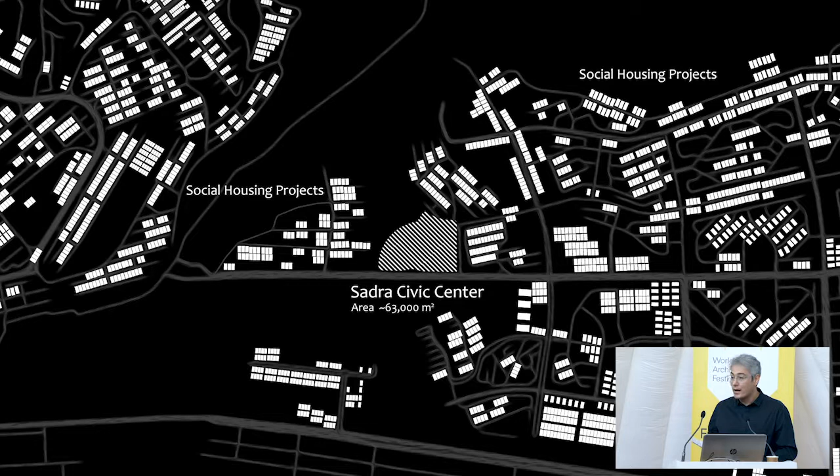The site of the project was surrounded by social housing projects that have been conceived and executed in the worst way possible. A repetition of typologies which are more about isolation than connectedness. Public space is just a residual of serial placement of low-quality residential towers.

But we have historically experienced living in different spaces in central Iran, where central courtyards organized roofed spaces of a house or neighborhood in continuous connection with nature, shadow, and the ground. In this project, we try to redefine the central courtyards by making them a public field instead of private ones, with diverse interconnections.

Roofed spaces are arranged around these permeable connected yards, and instead of a linear circulation, we have a sequence of connected agoras with varying scales. There is no street anymore.

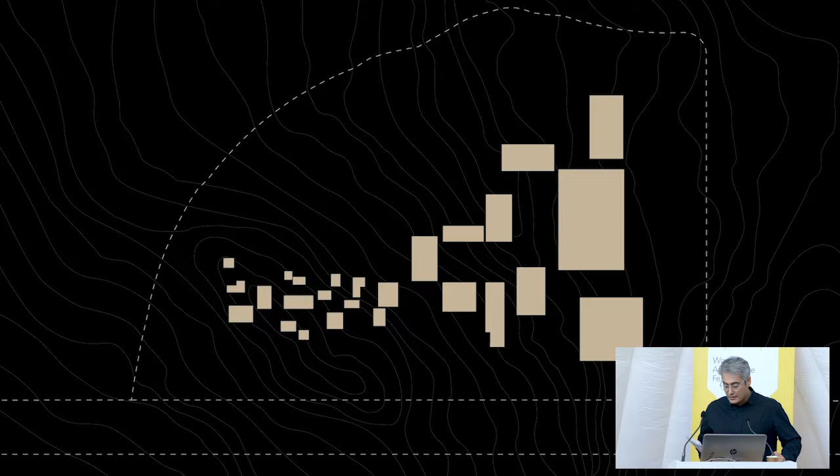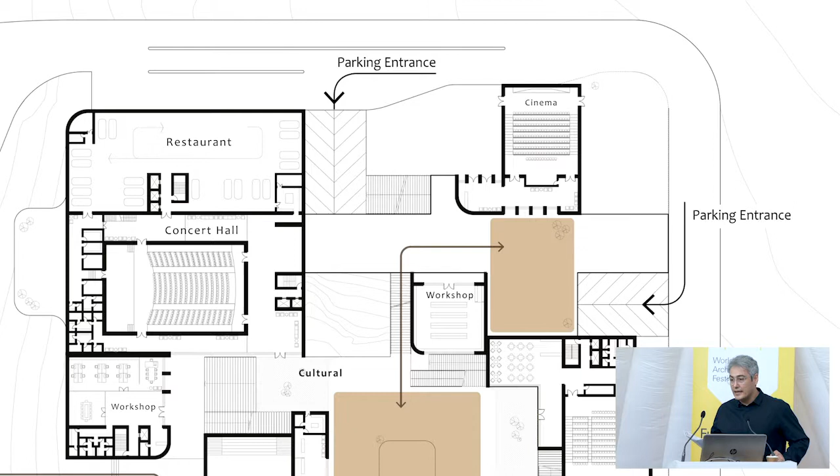In other words, not only do the yards inform the overall configuration of the project, but also the spatial pockets that host various programs are informed by them in terms of their scale and orientation, to form a connection between cells, as well as a healthy relationship between the project and the ground.

The result provides an antithesis for the neighboring social housing in its organization, its approach to provision of public space, in relation to the ground, and even in its way of negotiating the skyline.

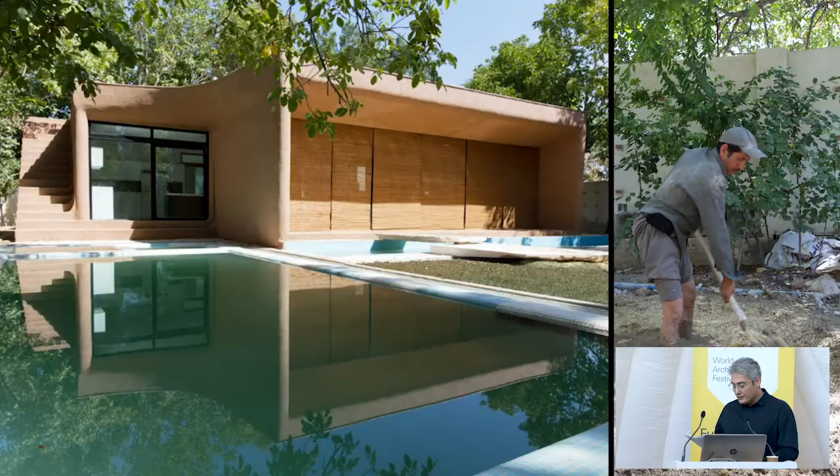In villages of Iran, construction is done by local people. Material formation is more primitive, approximate, and improvised. In the final round of the competition, inspired by the traditions of placemaking and construction, we try to develop a solution for the construction of the project.

The proposed construction technology builds upon our previous experiments. In a previous project, we gave some flexible guidelines to Mr. Hamid Khan, the son of the neighborhood grocer, to build a quality space from earth material.

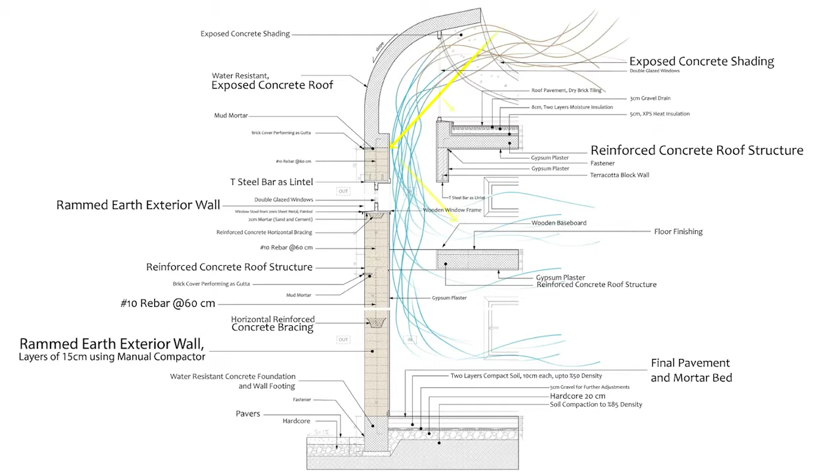We heard that later on he continued doing this for a living. We wanted to consult him about the construction of this project, but he was too busy to answer the call.

Here too, residential units will be gradually built around the courtyards by local people. Little by little, the city-like complex would grow from the ground.

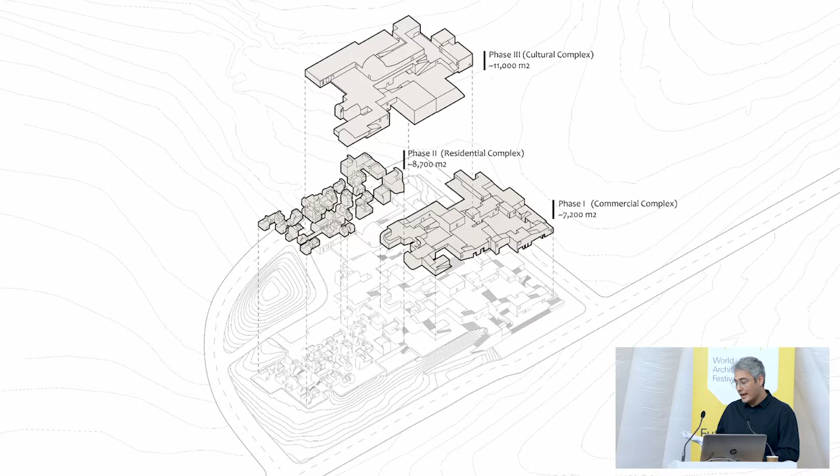In this hostile climate, a combination of form and material play the role of passive solutions for climate control. The growable gene of these material-driven forms can interlace the whole fabric of clusters in different scales related to their program.

With an active skyline in the desert, similar to the concept of thick ground, as traditional Iranian cities were often called, this is achieved through a series of proposed land operations to activate differing spatial datums.

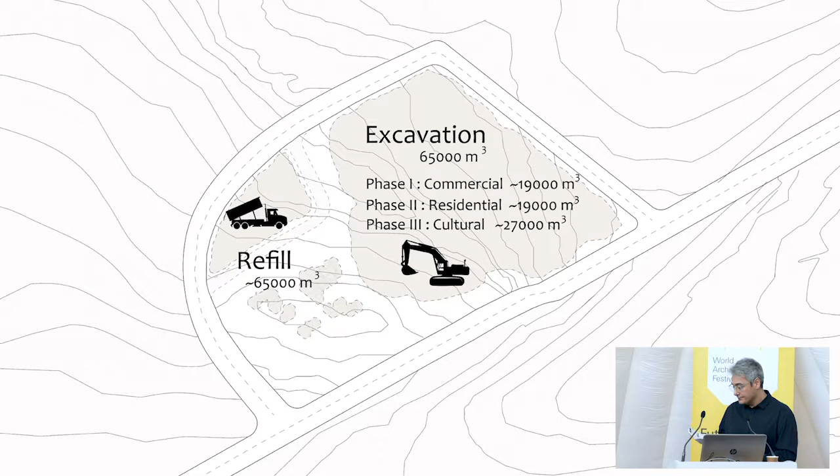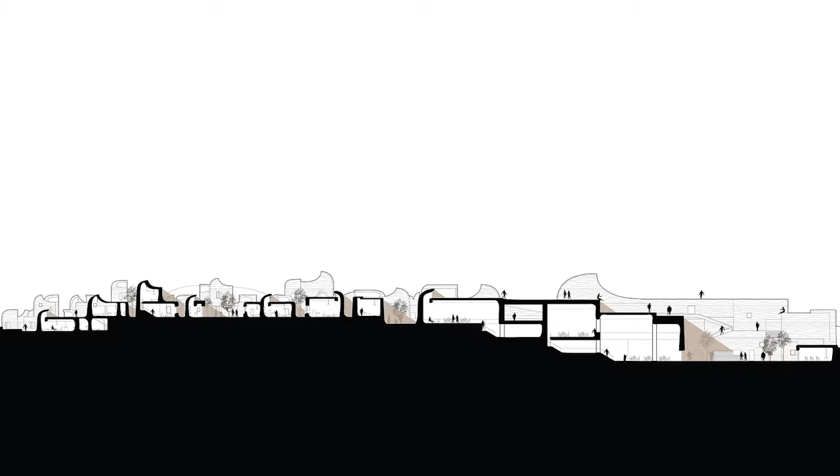In the center of Iran, the limits of shadow are the limits of habitable space. Variety of scales and different heights make different degrees of shading in shared space. This effect facilitates passage and pause in the project.

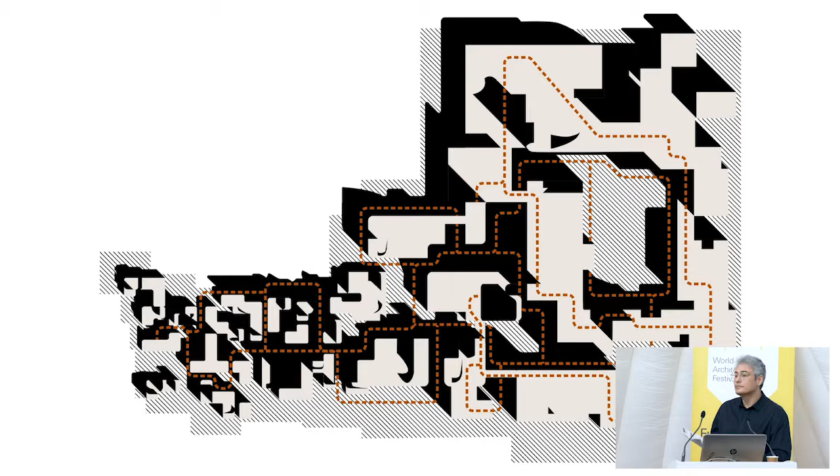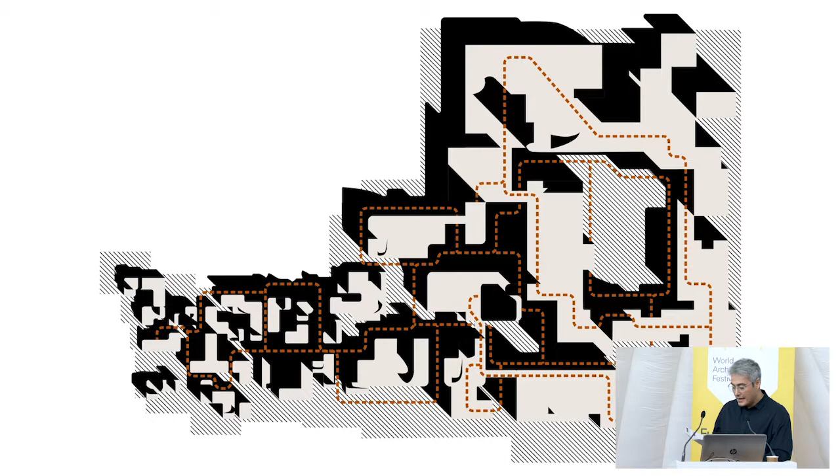Vast and diverse interiority provides services and welfare infrastructure for the district, and even beyond that, has the generosity to welcome the neighboring social housing inhabitants.

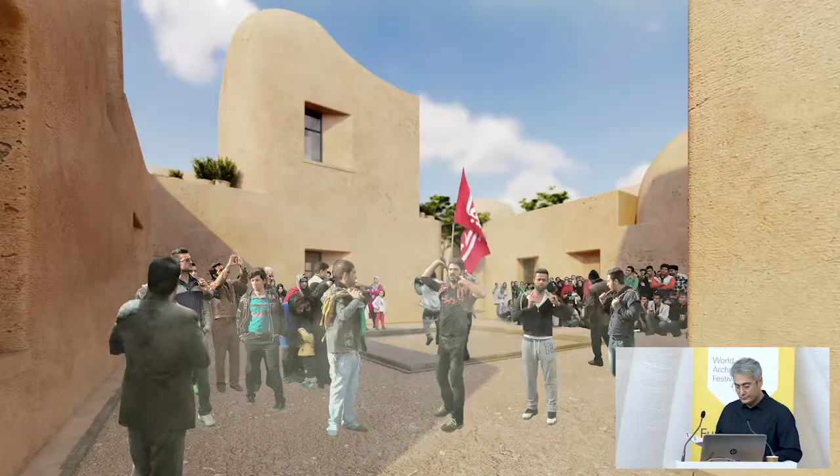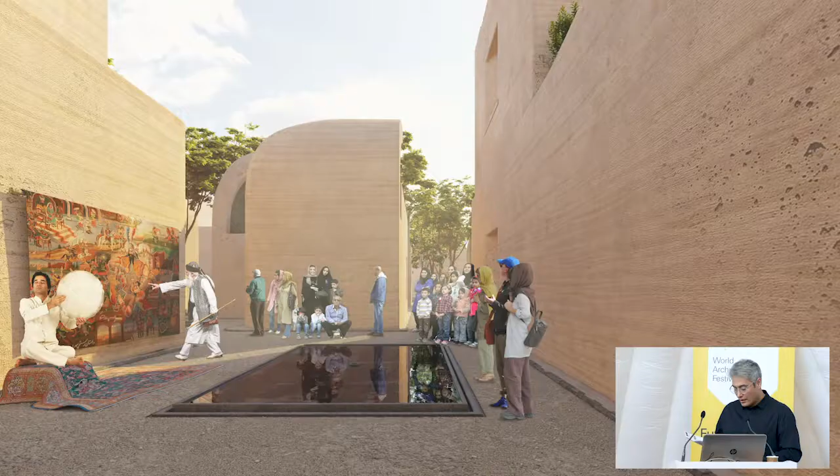In religious ceremonies or social celebrations, in cultural events, and even practice of daily life.

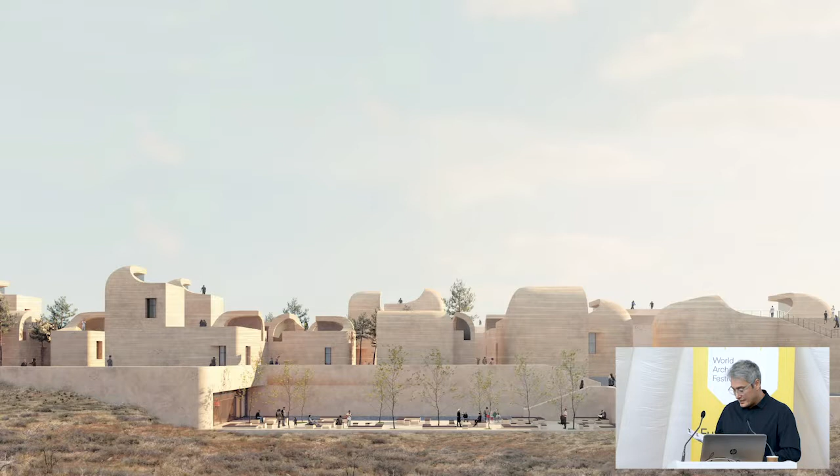Such a space is what I wish for us in Iran. A space that is informed by economic realities and spatio-social possibilities to resist the mass-minded production of space, right on the border of familiarity and strangeness. Thank you very much.

Thank you. Another really fascinating presentation. Karen, kick us off. Okay.

Thank you for your presentation. It's great. I think the starkness between the housing and this is enormous. I just imagine what it will look like in 10 years' time when people have moved in and put 100 satellite dishes or aerials and all the stuff people come with. And I think that is what is important. And I think of Doshi, the Indian architect, and how his housing and his projects actually accommodate for that.

So for me, it would really be, how is this going to look when the real people are there, and how much are you allowing for that, so that there's more difference, which is in the villages you showed us?

Actually, this mixed use is some cultural and also commercial, and the little masses are residential for renting, and the municipality wants to build this project because it compensates for the lack of culture and lack of standard of living in that housing. It's not one project, it's 7 projects in that area, in that city.

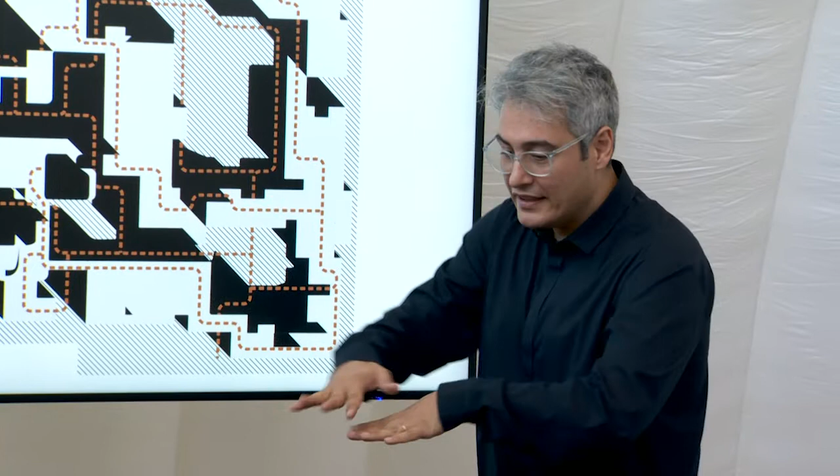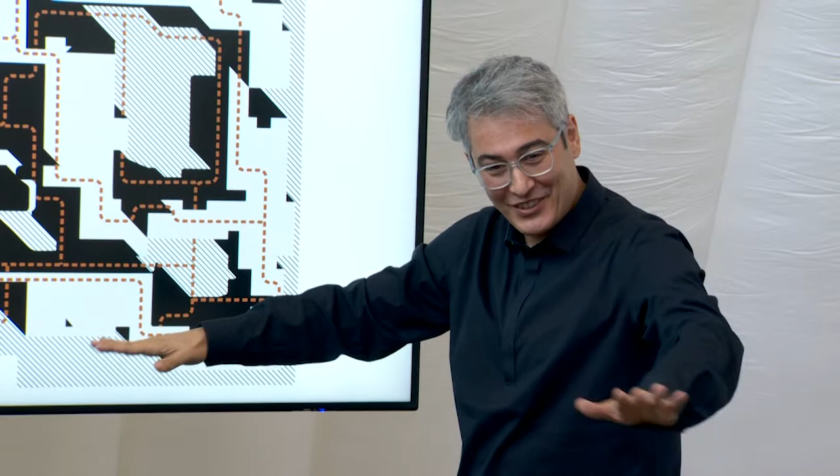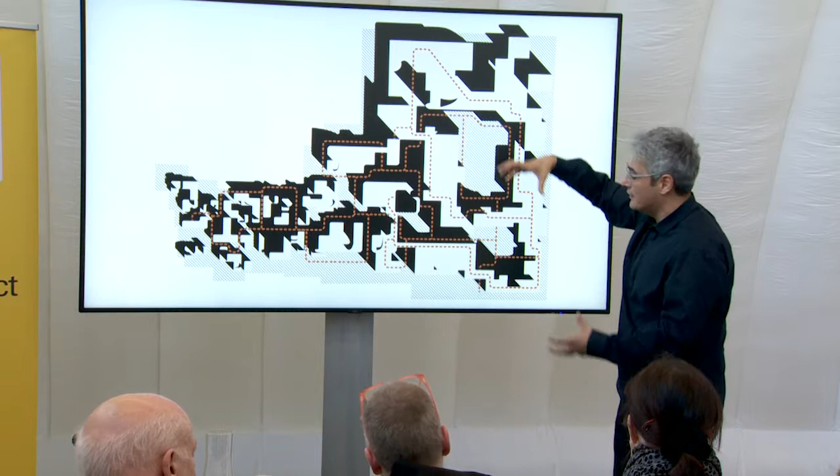It's 2 levels of promenade, one in the courtyard and one on the roofs. If you're on the roof, you can see everything, so you know that. But another way is that because of the scale, they are very tiny, and they are very big because of the commercial and culture aspects. And because we have mosques here and here, we can read the whole picture with the scale and height of these areas.

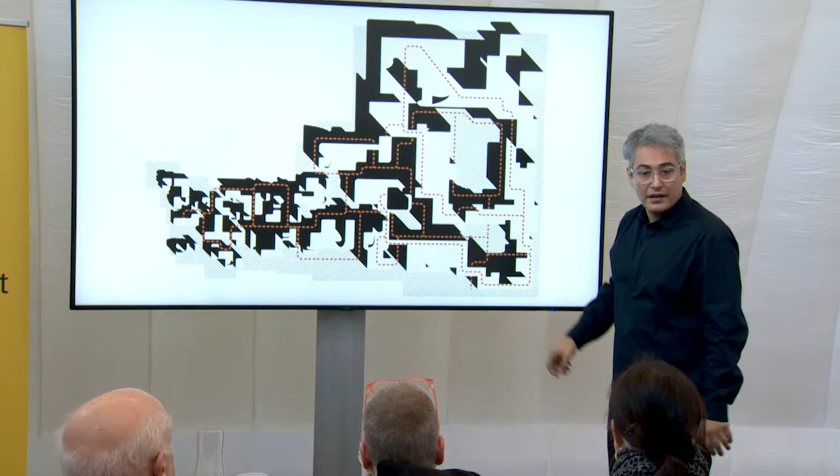Thank you. I think it's a really fascinating project, and the idea of trying to reconceptualize an Iranian vernacular for the present day has a kind of resonance. I think I agree with Paul - the idea that your renderings are extremely pristine. It'd be interesting to see what happens in reality when people start to inhabit it and it gets a little messier, but that's not to say it won't have a richness because of that vitality.

It's a competition entry, so what was the... Did this win? Is this going to be built? What's the future for it?

It was an open competition - 5 of us, me and some other offices, shortlisted. In the end we were the second one, not winner. But because of the situation of the collapsing economy, the whole project is...

Is it that they're not going to build anything? No. Well, that's a terrible shame. Because what was the winner like? Was it anything like yours? No, it was one of my friends - one building with steps going around, and it was a big interiority, you know.